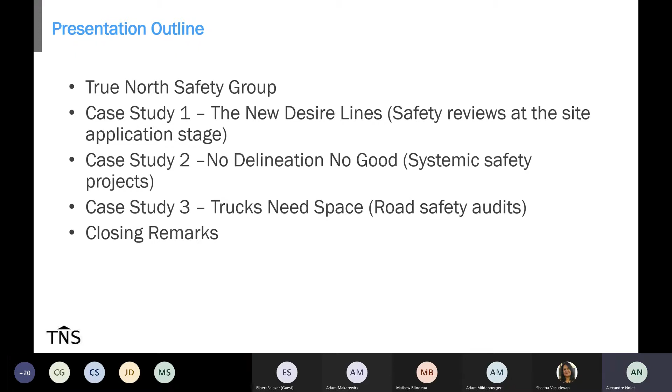Josée will present case study number 1, and I will present the other 2. Just before Josée starts, an introduction to True North Safety Group: it was founded in 2017. We're a consulting and forensic engineering firm dedicated to transportation safety. We are 3 senior transportation safety engineers, actively involved in the transportation community including ITE, CARSP, OGRA, CIT, OTC, CUTA, and others. We've developed and presented a number of workshops, mainly through OTC in the recent past, and hopefully we'll resume that soon.

I will let Josée present the first case study. Hi everyone, so this first case study is discussing safety reviews at the site application stage. First, we're looking at a liability case our firm looked at, after there was no safety study done when the application stage was ongoing. At this location, there's been a new development to the left of the picture taken, including 2 condo towers, generating a lot more people in the area, including pedestrians.

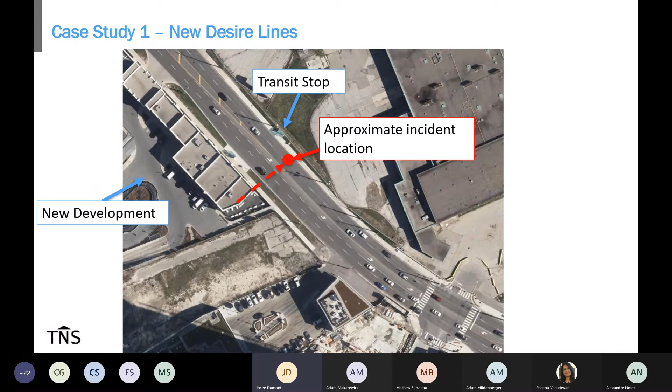Alex, if you can move to the next one. So looking at it from a street level, we see that clear desire line in daylight between the two transit stops. So obviously, going somewhere and coming back, you'd be on one side and then the other.

We also see that in the evening, under nighttime conditions, there's a low lighting level. If you look to the right of the screen, that's particularly true where that transit stop is. It's in a darker area than the rest of the roadway.

So if there had been a safety review at the development application stage, those are things that could have been noticed, and things that could have changed would be better lighting conditions, especially where that darker area is, or moving the transit stop closer to the intersection so that it's not that much of a detour to get to the intersection to cross with the right-of-way.

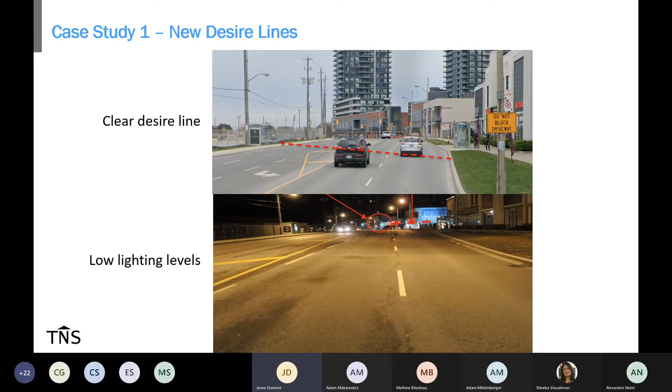So another study we were involved in, this one was at the site application stage. We actually got involved before the TIS was started. We got approached by a developer who was looking to put a new multi-use development in that green space in the middle of the screen.

They started talking with the municipality and were told that they needed to investigate safety because the municipality didn't think they would allow it the way it was going to go. The developer was not able to purchase the three houses on the right side of their site.

The municipality was pointing to them moving their driveway access to this side street, as opposed to the minor collector that's going kind of northeast and then east, but that's something they were unable to do.

So when they approached us, they were looking specifically at sight distances from the property access, but also at a safety study for the area that we see. We were not involved in the signalized intersection you see to the left of the screen, but it involved the rest of those intersections.

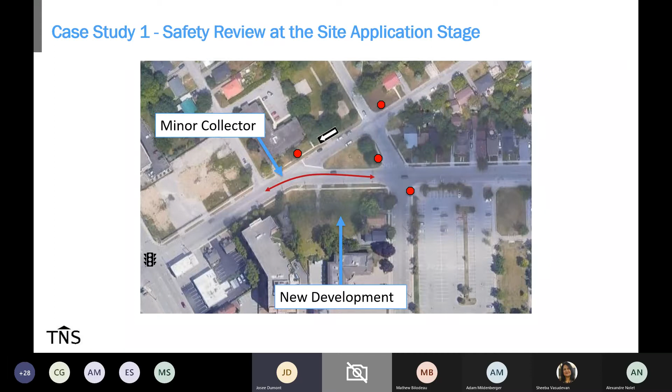You can move on to the next one now. So when we got to the site, we were able to see that at the proposed access, the departure sight distances were currently just on the edge. They were meeting, but not completely.

There's a couple of things that could become obstructions. And when we looked at the proposed plans, the preliminary plans by the architects, we also saw that the building, where it was going to be as proposed, was also going to impede those sight distances.

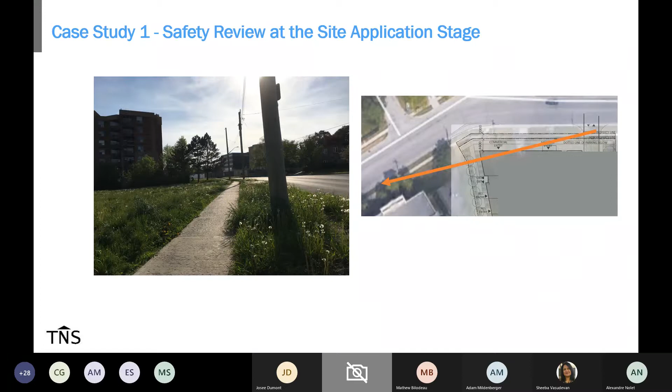So Alex, if you can move to the next one. We also looked at collision history in that study area, and we saw that for most of the intersections it was fine. However, that intersection just east of the site had a history of 15 collisions.

I think that was in a six-year period. What we saw was that all of those 15 collisions were angle collisions, and they all involved a northbound vehicle, approximately evenly distributed between involving an eastbound or a westbound vehicle with the northbound vehicle. They all indicated either that the northbound driver failed to obey the traffic control or failed to yield the right of way, and none of those indicated that environmental conditions were a factor.

We also looked at a speed study that had been done previously, and with a 50-kilometer-an-hour speed limit on that collector, the 85th percentile speeds were at 49 kilometers an hour in both directions, so there was no issue of speed, at least on that collector.

When we got to the site, we also saw that this collector is going right, but as you're going northbound, eastbound, there's this street that's oncoming to you, and that's the straight path.

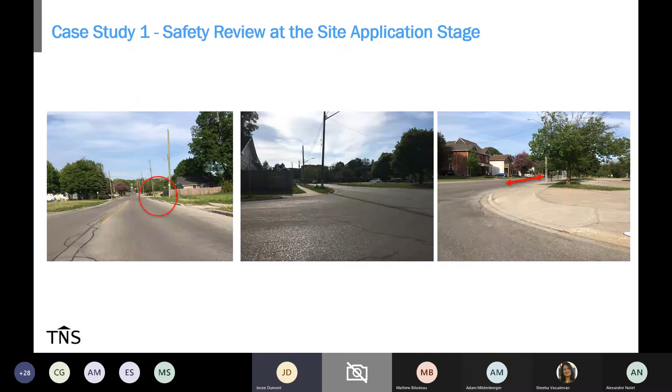So we're able to provide recommendations for the study area, not only the site. And the modifications that our recommendations included some modifications to the minor collector, to reduce the pavement width and then slightly realign it to the north. So it was fairly wide.

And so we included to have those done either on a permanent basis with reconstruction, or on a shorter term to have it with markings and delineators to adjust the lanes so that drivers are going a little bit more to the north of that paved right-of-way.

We also recommended that the grass or landscaping be kept very low on that south side, and that to add a sidewalk on the north side.

For the skewed intersection, we recommended that they close the one-way completely and extend the park. So there's a little park just north, and then to extend that green space into this triangular green space that is not really accessible in the middle of that space.

And then alternately, if they did not want to close that road completely, because it does provide some on-street parking, that they do a partial closure at the intersection so that there's only the one southwest-bound lane, and then that there's a pedestrian crossing installed at that intersection as well.

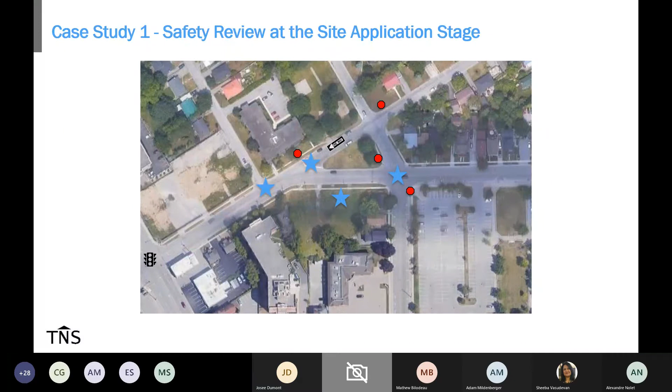Excellent. Back to you, Alex. Perfect. Thanks, Josée. Well, this is a great example that when safety is assessed at the site application process, or as early as possible, there can be some significant safety benefits for sure.

All right, so our case study number 2, no delineation, no good. This is the type of collision that we get involved with quite often. In this case, it was a motorcyclist traveling southbound on Centerline Road, and the motorcyclist approached the curve on the approach to the lower road, and unfortunately never made it through, lost control, exited the roadway and hit, I believe, a tree.

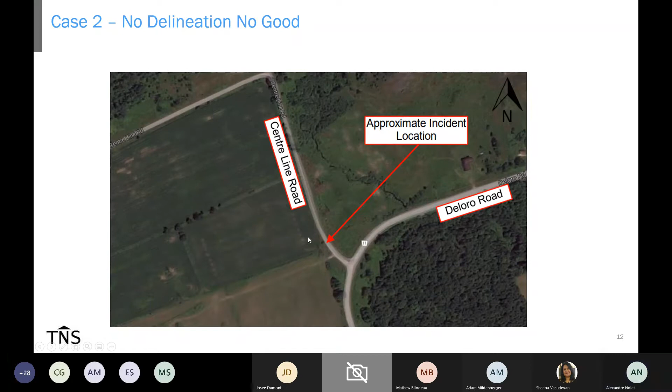So I'll show you another, the other from the street level. We had a narrow 2-lane roadway with a number of vertical and horizontal curves. The motorcyclist lost control where the one chevron is installed. At the time of the collision, it wasn't visible, it was hidden behind vegetation. So there was really a lack of curve delineation, meaning pavement marking, warning signs, chevrons, those kind of things.

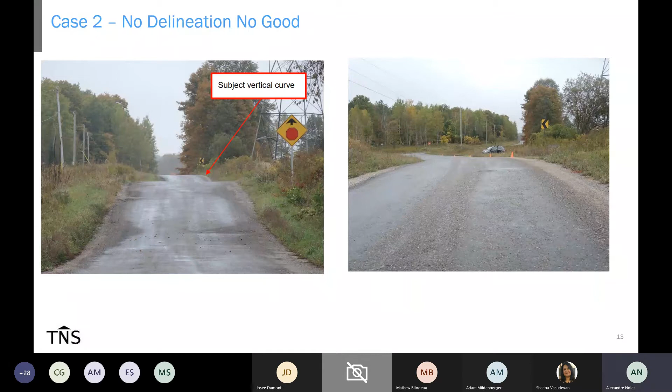Only when you get to the curve itself do you realize that it turns to the left just before the intersection. The conclusion was that the reduced visibility, the absence of pavement markings, the absence of curve warning signs, and the chevrons were all factors that increased the risk of a loss of control at the subject location.

There is some evidence indicating that severe collisions are actually widely distributed across the road network, and very few individual locations in rural areas and on the local system experience a high number of severe collisions. So road authorities have trouble meeting their safety performance goals by only investing in high collision locations.

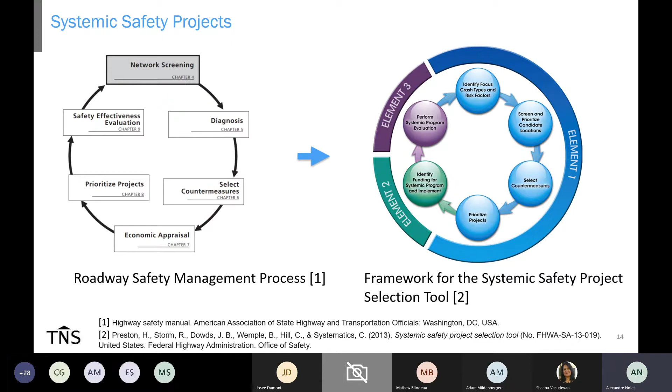Basically, what we want is to identify locations where, like the case study we discussed, there isn't any delineation, and determine what can be done at these locations. But the thing is, with a large road network, where do we start? Due to resource constraints and other priorities, municipalities are left reviewing individual horizontal curve locations only when a complaint or a collision is received.

So there are solutions, and systemic safety projects are one of the solutions that can help minimize the cost of these studies, because it's all about the methodology that you develop and apply, and there's a lot of work that goes in beforehand. But when you apply the same methodology to each site, and because of the repetitive nature of the reviews, you can become very effective and complete assessments of large road networks under reasonable budgets.

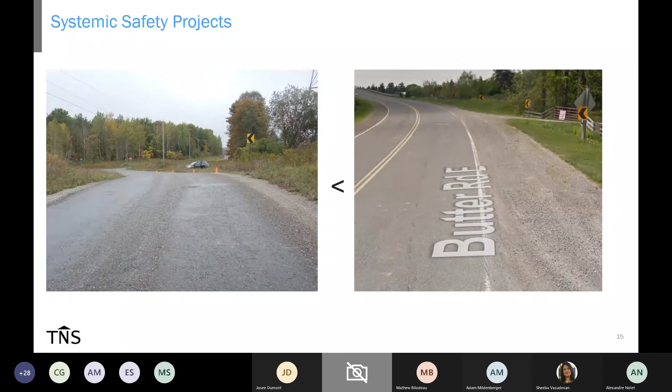I just want to briefly discuss a large project that we completed for the Region of Halton. There was a high number of kilometers of roadway in the region, and the goal was to evaluate and identify horizontal curve traffic control device deficiencies and remedial measures. So we essentially needed to determine if the curve warning signs and chevrons in place complied with OTM Book 6, and we needed to travel all of the roadways and flag whether safety deficiencies existed.

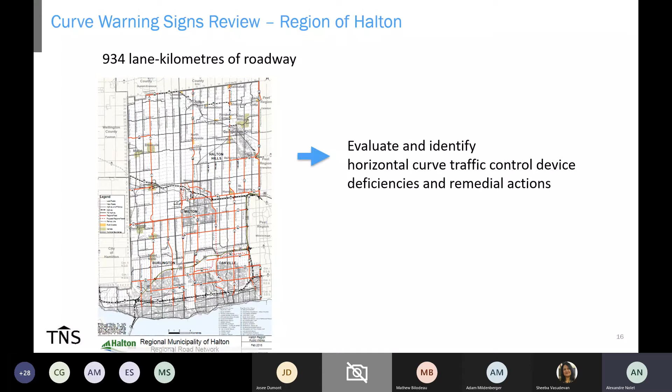We definitely needed a good methodology in place, otherwise you would just get lost. So the methodology used was essentially to create an inventory of existing curve locations, prepare forms to be used for each location, undertake a field investigation using electronic video ball bank readings, compare the existing location to the guidance provided in the OTM book, and summarize the recommended changes and produce work orders for implementation. So this is what was collected on site.

This is the electronic ball bank that was used. It's all GPS referenced, and it can be looked at later on for each curve to determine what kind of readings were measured.

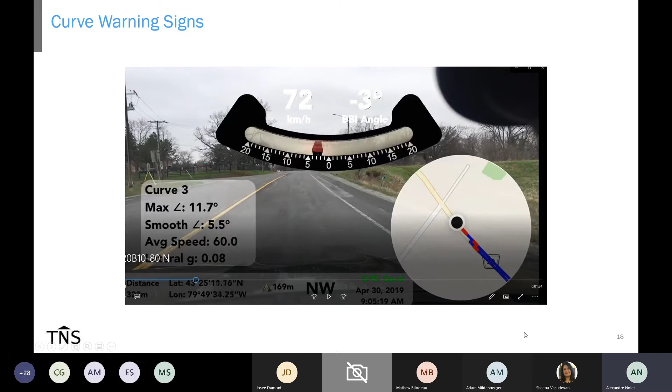Essentially, there were four key deliverables for the project: an inventory of the existing curves, the curve assessment summary forms, the ball bank videos, and work orders. That was very helpful for the region because they would get a work order that summarized what's existing, what kind of signs are in place, and what has to be done to comply with OTM Book 6 in this case.

That's a skewed intersection. This type of project we completed for both the City of Ottawa and the Region of Durham, where they identified all of their skewed intersections on their road network, and we did a comprehensive review of each of them and tried to determine from a risk perspective which one should be addressed first.

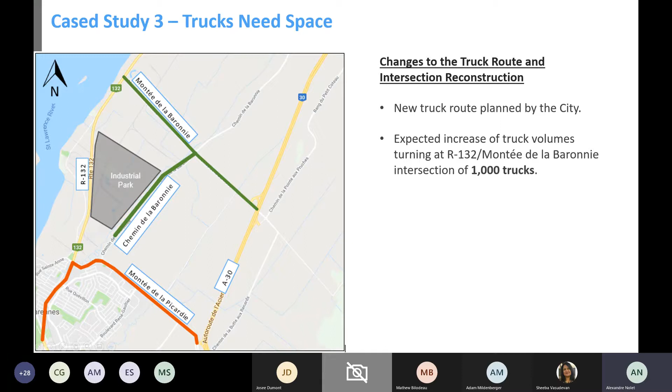But here we're talking about approximately 1,000 trucks per day, and large trucks, not single unit, but pretty large trucks that would now be using new roadways. This is one of the intersections, which is why we were retained - to look specifically at this intersection.

It is a T-intersection that is stop controlled. The southwest to northeast roadway is a provincial road, 90 kilometers posted speed. There is also a signed bicycle route on this roadway.

It essentially looked at whether there should be turning lanes. So they looked at the left turn warrant, and they also did an auto turn analysis to see if trucks could make the turn or not. That was pretty much the extent of the safety evaluation or assessment done to determine the type of configuration that should be installed at this location.

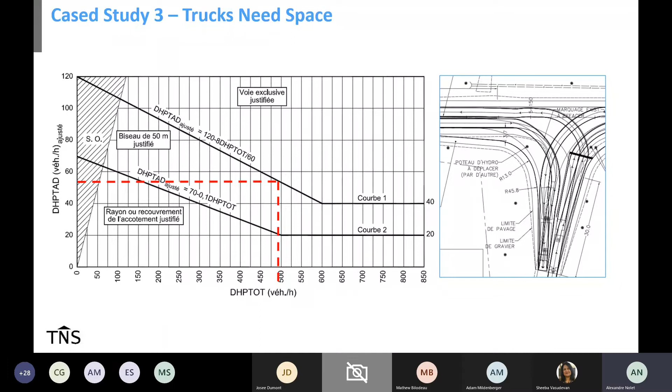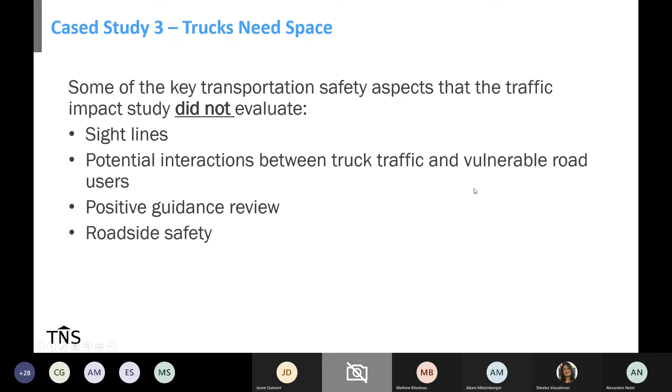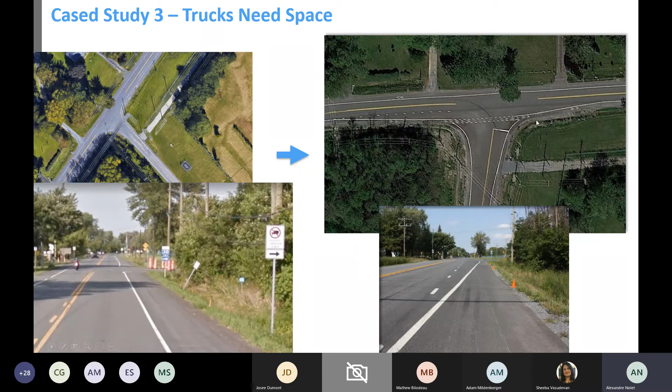I have some examples of what it looks like at the moment, after construction, just to give you a sense of some of the safety issues they're now dealing with at this location, especially with trucks turning and being in conflict with some vulnerable road users and other vehicles.

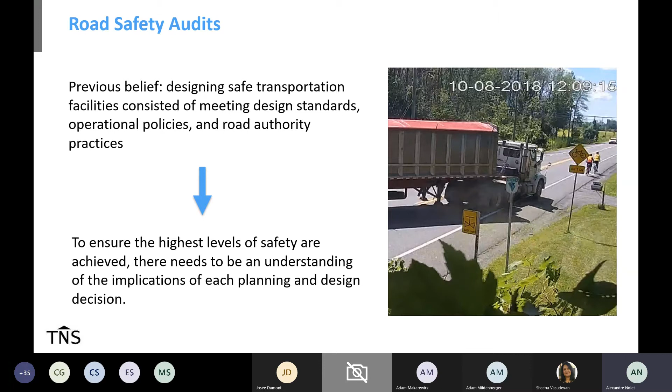The main barriers to road safety audits are cost - it's often perceived as a very expensive type of project. Delays - it takes time to complete, and the design team doesn't necessarily like this extra step. And complexity - there are a number of people involved, and it's perceived as only for large transportation projects.

But it does not have to be. The key really with road safety audits is who and when they're completed. So who - you want qualified safety experts to do it. And for simple projects, you don't necessarily need multidisciplinary teams. You just need the right people doing the analysis.

And the when is also really important - at the planning and design stage is where you will save more money in the long term, because changing roadways or making modifications to existing facilities is quite expensive. Making changes to drawings is not too bad.

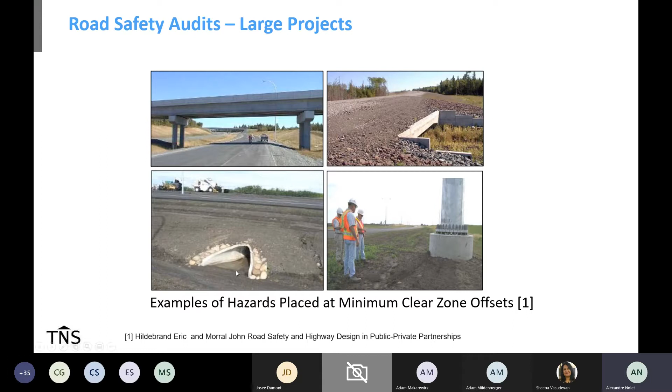So there's this perception that safety audits are only for new freeways, which is very true - it can and should be done for those larger projects. But there's also great value in doing them for smaller projects, which more and more municipalities are requiring, and we see great benefit.

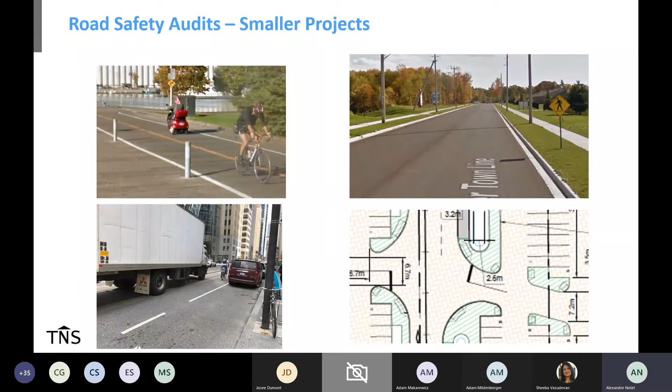So we could go on and on providing examples like this, but as closing remarks, our message is that we do not necessarily need elaborate strategies or wait for new technologies to help us achieve the goals of Vision Zero and minimize liability risk.

An effective approach is to systematically conduct safety reviews or audits in the early phases of each transportation project, so that glaring safety issues can be identified and addressed before they get constructed.

Remember that transportation safety is relatively simple. We essentially need proper connectivity, delineation, separation between road users when speed differential warrants it, and proper warning. To ensure these safety principles are implemented, we just need road safety to be systematically taken into account. We believe the three examples we gave you today are some of the strategies that can help.

They definitely do not represent a complete list, but these can definitely be done in a relatively short term and help. So thanks a lot for listening to us.

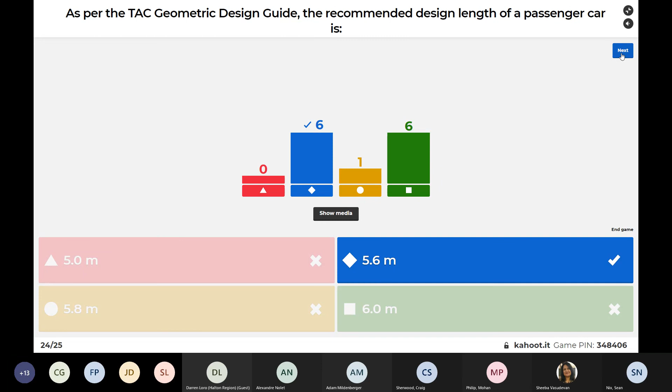And that is the last question. Uh-oh.

Woo. That's wonderful. I think that is Sean Nix, right? So I guess I've restored everyone's confidence in Mohawk College curriculum. Is that it? And at least when you were teaching.

Thank you to all who participated in the trivia game and also to the spectators. Our winner for today's game is Sean Nix, followed by Josée Dumont.

And could you please identify who is the third place? Darren Loro. I guess I took the nickname thing a bit to heart. And the second runner is Doreen. How do you pronounce it? Was it me? I wasn't paying attention. It's Julia. Oh no, Josée. No, the third one. Darren, Loro. Yeah, Darren. Darren. Okay.